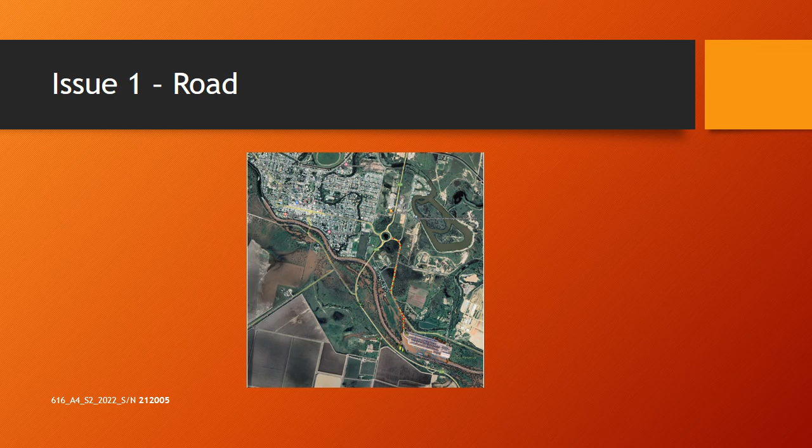And here we see the actual turn off onto Kildonna Road from the New Highway roundabout. The road itself, the geometry is okay, being that the turns meet standards, the runoffs and the elevation above the road is all quite good, but the road surface itself has degraded.

And here is the actual inland port itself. Whilst the rail traffic has taken a lot of traffic off the road from the point of view of holistic Australia-wide, it has seen a local increase in traffic and a lot of damage because of increased use.

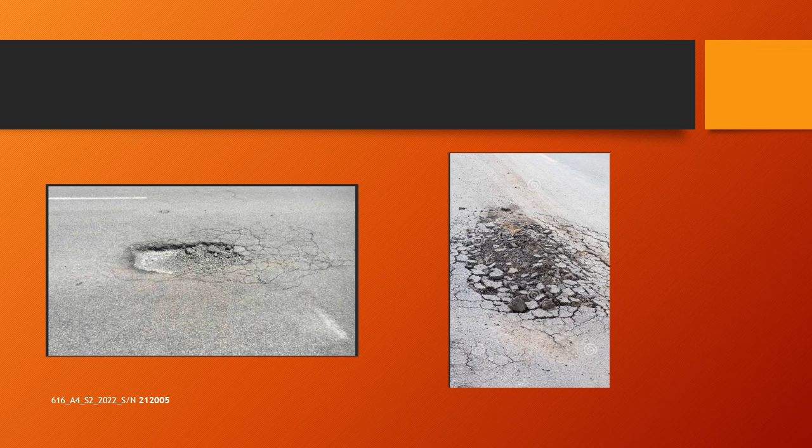With the completion of those surveys, we can then use known industry standards, being the Australian Guides to Pavement Technology, Pavement Evaluation and Treatment Design, and the TMR Pavement Rehabilitation Manual, to devise ways of interpreting the data to give us the best result for a longer term design.

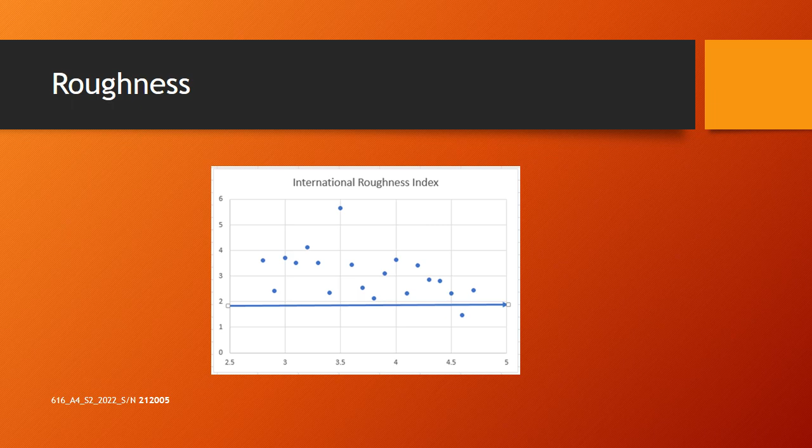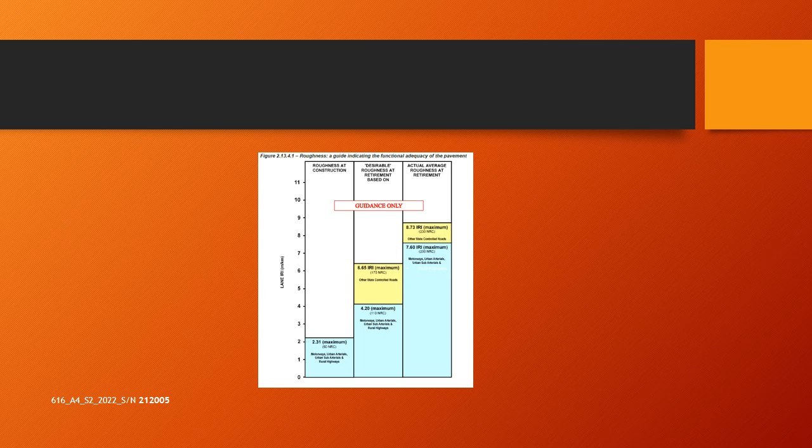The issue with this is that it basically allows water to pool up on the road, and as we all know, water is not the friend of the engineer. And it then presents a hazard to vehicles using it. Anything that pools in there then creates a problem as far as trafficability goes.

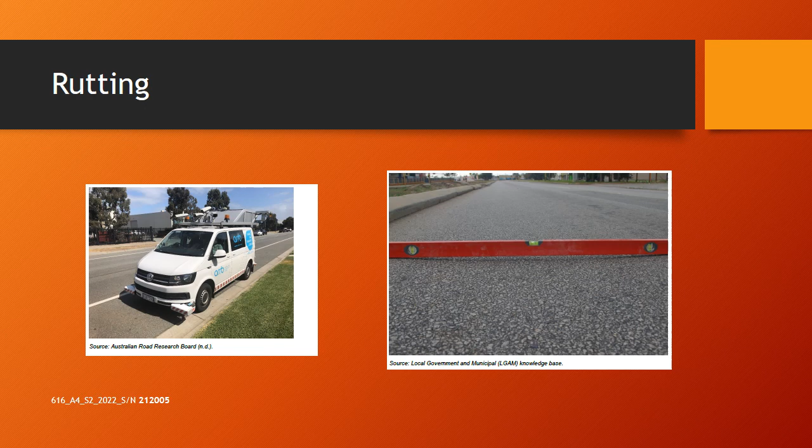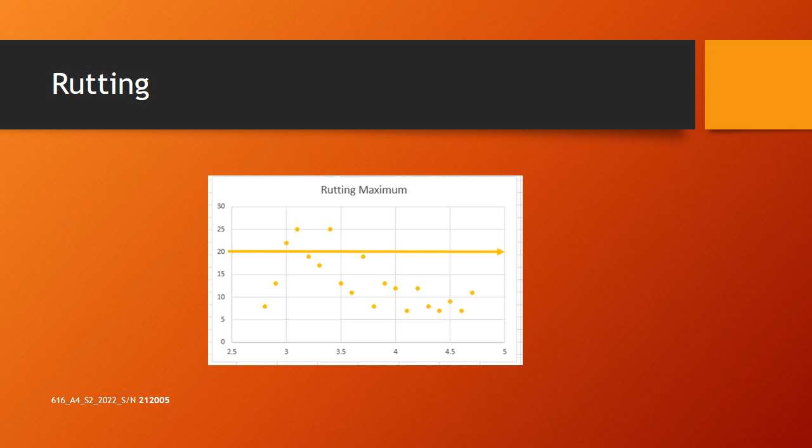We've had the rutting survey completed, and this is the result. As you can see, overall the rutting is not particularly bad. However, we do have a couple of sections where the rutting has exceeded the recommended maximum, and a couple of sections where it's approaching it. So this does indicate that there are sections of the road seeing degradation through rutting, possibly pointing to failure in the base.

The next survey that we completed upon Kildonna Road was a falling weight deflectometer. This technology uses a 40 kilonewton load to measure the rebound of the road as the survey vehicle drives along the road and completes the survey. This is actually taken in situ by the ARRB, showing Kildonna Road being measured. And it is a very effective tool.

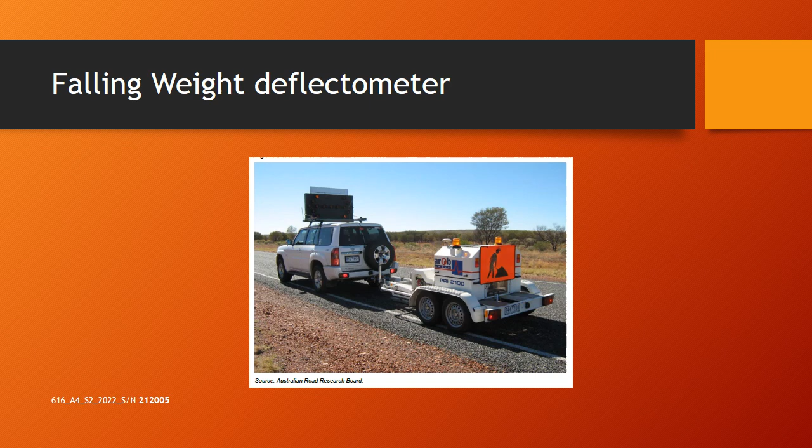It's non-destructive in that you don't have to dig up the pavement to get a reasonably good understanding of what's actually going on under the pavement and under the base.

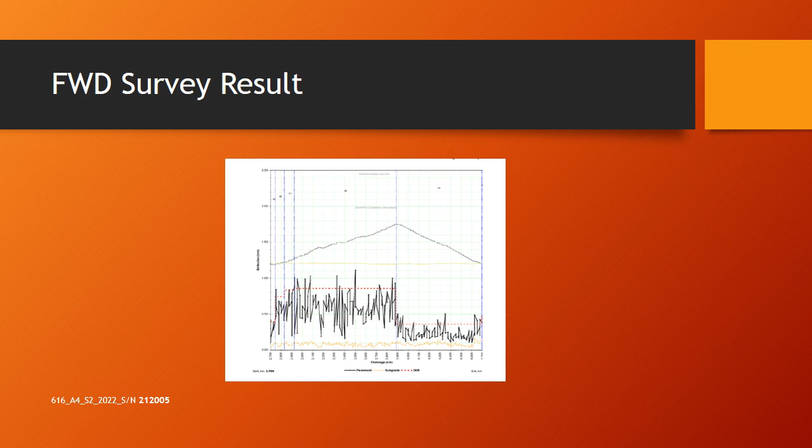The advantage of what we're seeing here is we now have an expectation of what is going on in the base and in the subgrade of the road. And this is an example of the sort of information we can glean from the falling weight deflectometer surveys, where we can basically use

the measurements of the deflections, the rebound and penetrations, to give us an estimate of the California bearing ratio, which is a pretty universal strength parameter that's used to determine the modulus of the stiffness of the soil underneath the road, to then allow us to design cover. There's a couple of ways of doing this,

and it's always a key parameter we need to have, and the advantage of that falling weight deflectometer is we now have this as part of the start of this work, so we can now use this to form an estimate of what's going to be required to complete the roadworks.

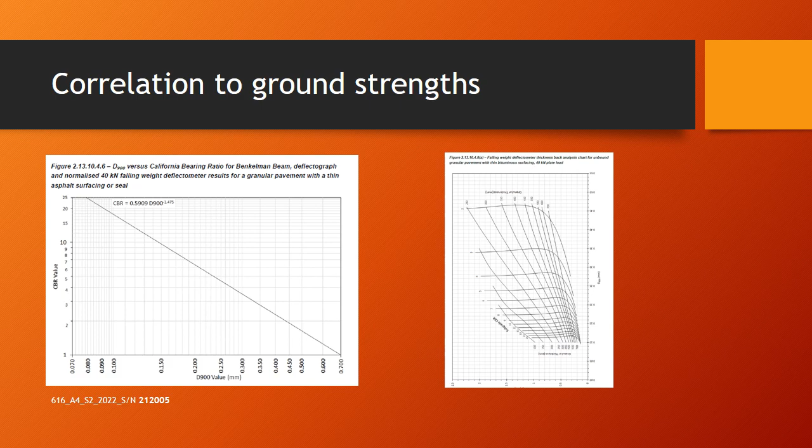By using those empirical methods, we've basically now been able to describe the sections, and we've come up with moduli for the actual layers that are important to us. So the granular layers have industry-defined parameters. They're manufactured fill, and the asphaltic concrete, the AC, what we'll see in the engineer's report, have engineered parameters that our modelling and our data use.

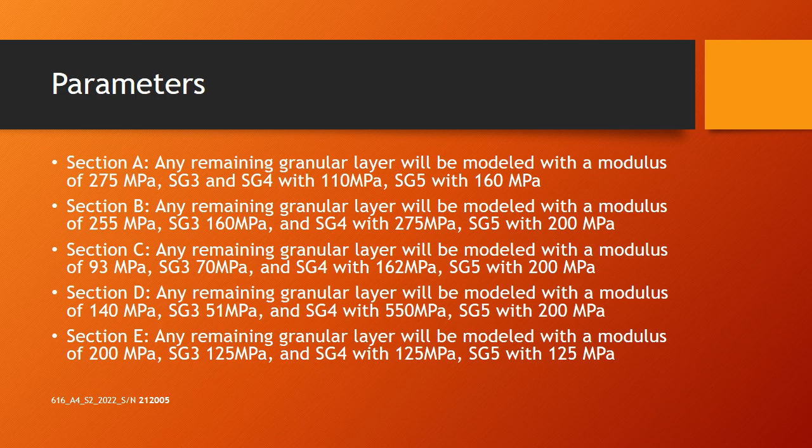However, the soils and the subgrades, they don't. They can be individual because they are still an in situ native material. Thus, we've now been able to quantify what those materials look like, and this allows us to start looking at repairs.

With regards to the running surfaces, we are in a warmer traffic zone, so Austroads and industry bodies basically give us a guide as to what we can use for the seal on the surface. So if we want to go with a spray seal, Austroads indicates that, as it's a rural highway with no high stress, with an average truck use of 2,000 vehicles, it's going to recommend a HS2 double seal, which is a standard seal for these sorts of works.

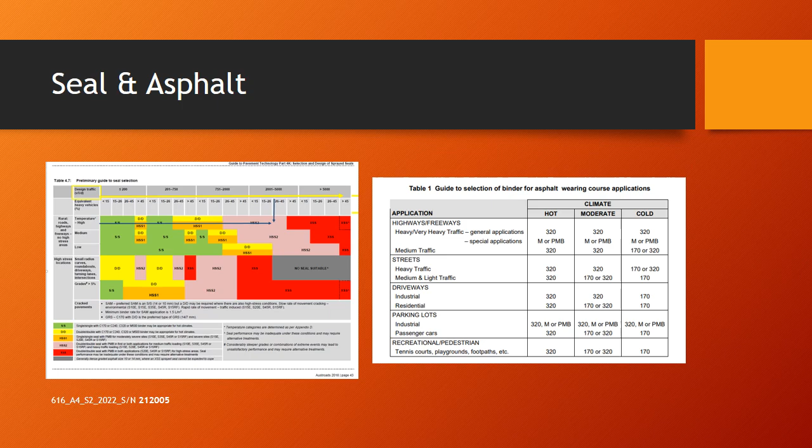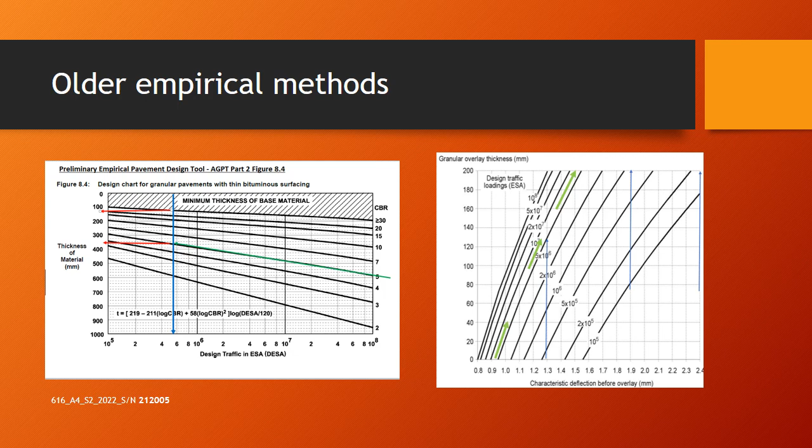It is worth stating here that the geometries of the road do not allow us to do much in the way of overlay except for section E at the end of it. Unfortunately, the roadside infrastructure is such that we can't just apply an overlay.

That was then. These days, however, we now use an industry package called CIRCLY 7, and indeed all our remediations were done using CIRCLY, and this has the advantage that it can actually do a lot of the thinking, and the optimization can be done using CIRCLY.

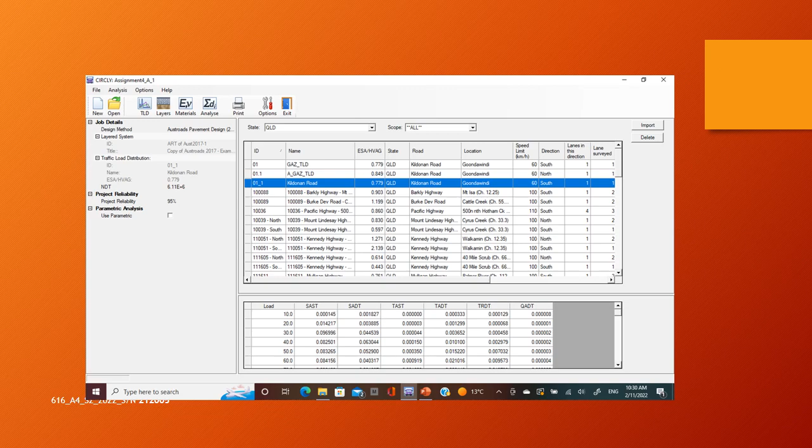We then start by loading up the parameters into our layers of the road. So you're seeing down the bottom, you're seeing a granular road base. We've then got some subgrades that we took from the estimates from the falling weight deflectometer survey to then give us, that's what the in-situ road is.

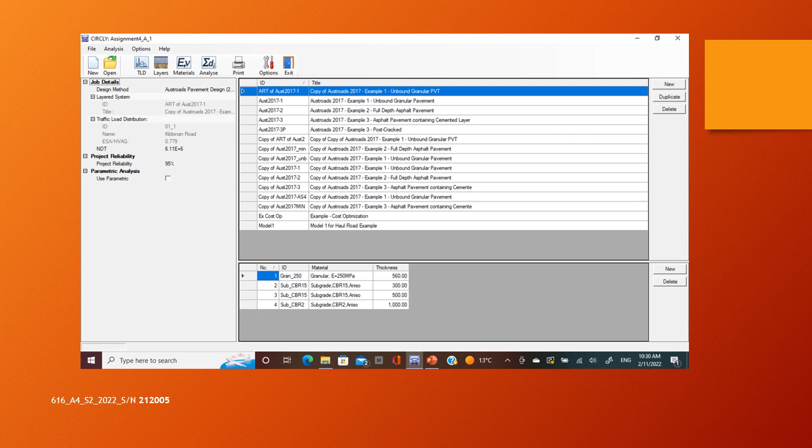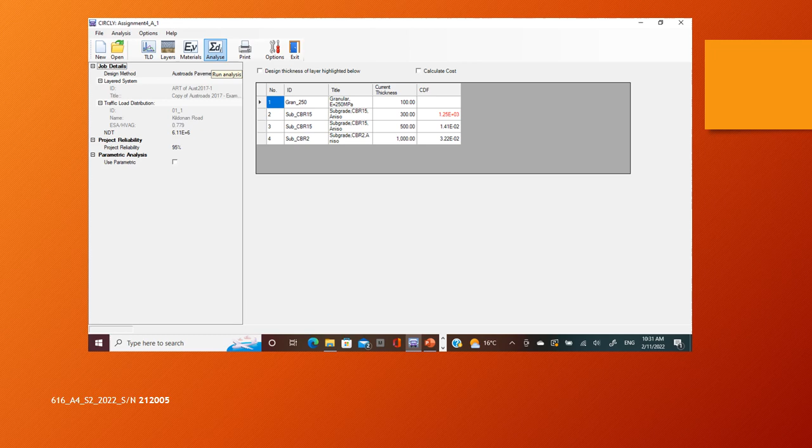We then model the basis of the model, and the software has then used itself to describe what's basically popped up, and within an optimisation it will say certain iterations don't work, and it will then supply you with thicknesses that can be used to build the road, and it basically provides you a very good remediation answer for any of these roads. So this is how this process was done. It's why each individual section has differing engineering parameters.

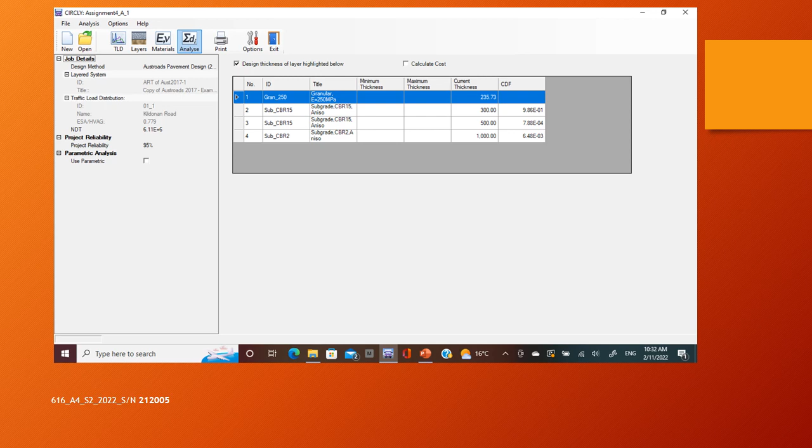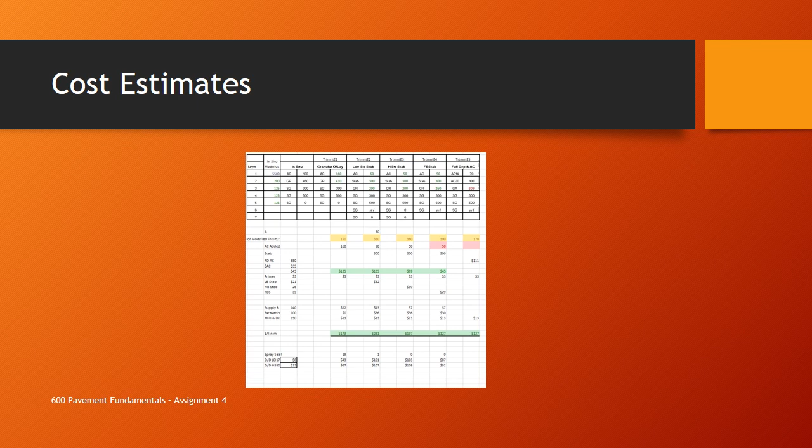Once we had parameters, we then basically used our extensive database of how we cost things to come up with costing models. So we basically costed the primers and the stabilisations and whatever else that are required for all these roads, and we've put these models into basic cost estimates. And this is the next slide here. This model here shows all of the various models that were estimated.

The pink blocks show the expected reseals. The downside to thin bituminous seals is that they do require resealing to preserve the base and stop the road from degrading to get the maximum out of it. And you can see that there's going to be a couple of sections in a 20-year life of interruption, and that is probably going to be one of the criteria that hopefully councillors will take into account when you make the decision, is the reseal time and interruptions.

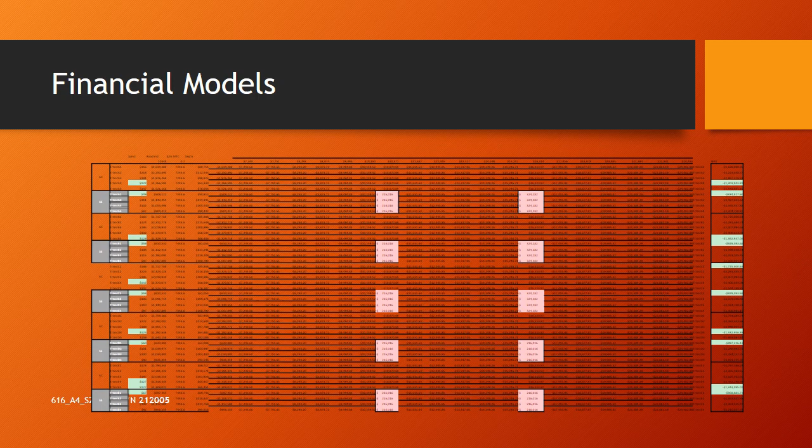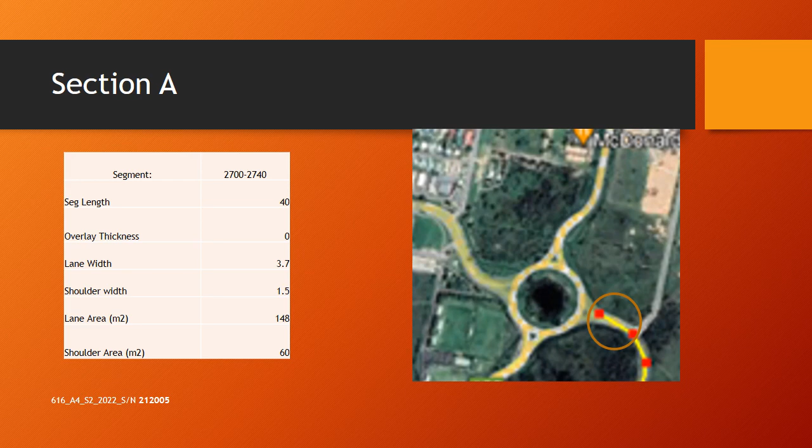Section A, basically running from the roundabout to intersection 1. It's only 40 metres in length, so it's not a particularly big section. It does have shoulder area associated with it, but it is not insubstantial, and it is that first section. The two optimised costs we've come up with is a spray seal, the less durable option. It has the lowest initial cost of all the options. Total cost is relatively low for this section. Basically comes down to $49 a square metre.

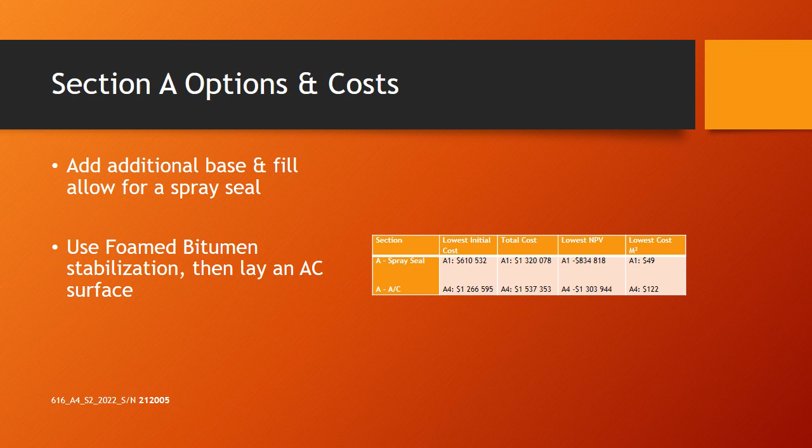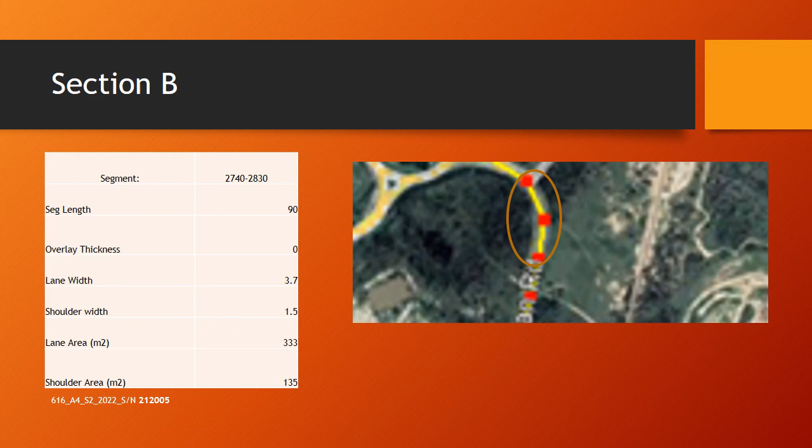However, the more durable option, and probably the one that we would prefer, would be the use of foam bitumen to stabilise the base and get some strength into that base to withstand that loading. And then we put an asphalt running surface. Section B, which is between Russ Hughes Road and J. Peterson Road. Again, slightly larger than the previous section, slightly different. And here we have the costs, $59 a square metre for the spray seal with a little bit of fill to make up the base. So we excavate out and put some fill, or $129 for a full depth AC pavement.

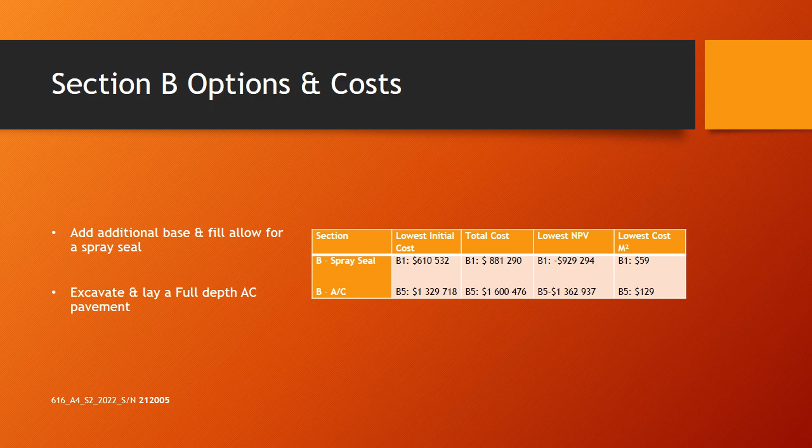Okay, section C, another shorter section. Very similar to the previous one, $59 a square metre for the spray seal option, or $132 a metre for the foam bitumen stabilisation and then AC surface. Slight differences in remediation due to the differences in the ground conditions in each of these sections. Section D, this is a longer section, 900 metres, obviously going to be relatively more expensive than the other section. But you can still see on a unit cost, $60 a square metre is not terribly much for the spray seal base, or $125 for the foam bitumen stabilisation and then laying an AC surface on top of it, which will get a lovely driving result.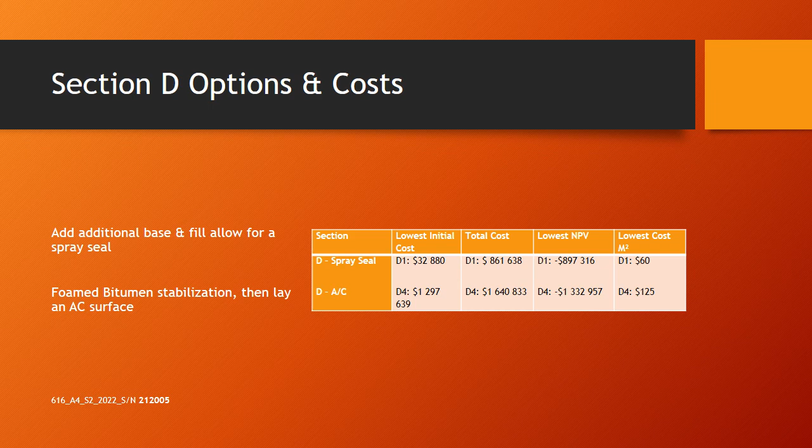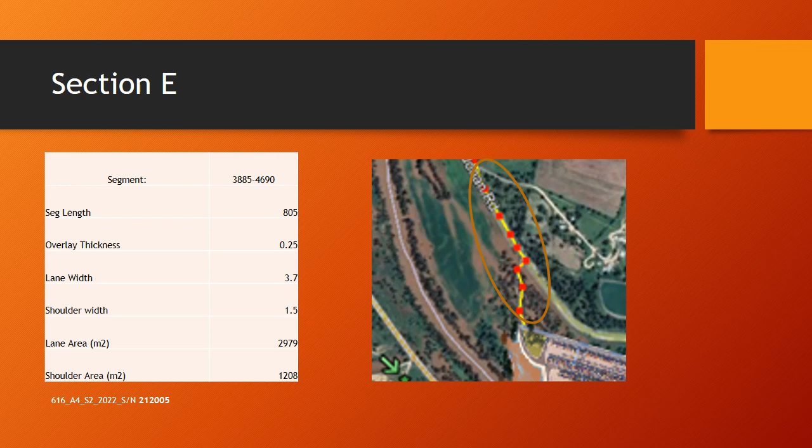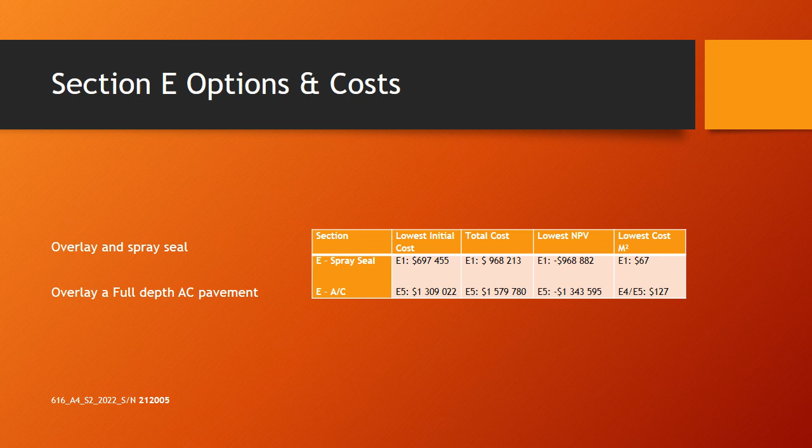And section E, the entrance to the Ash Barty terminal, you're seeing again another 800 metre section, not the longest but quite a large section. Again, $67 a square metre for the spray seal, or $127 for full AC overlay. Now, section E is the only section where we don't have pavement geometry issues with regards to height. So we are able to just purely put an overlay either way onto the existing base to give us the strength into the base and the wearing course. So there's options for the council to select there whichever way we wish to go with the funding.

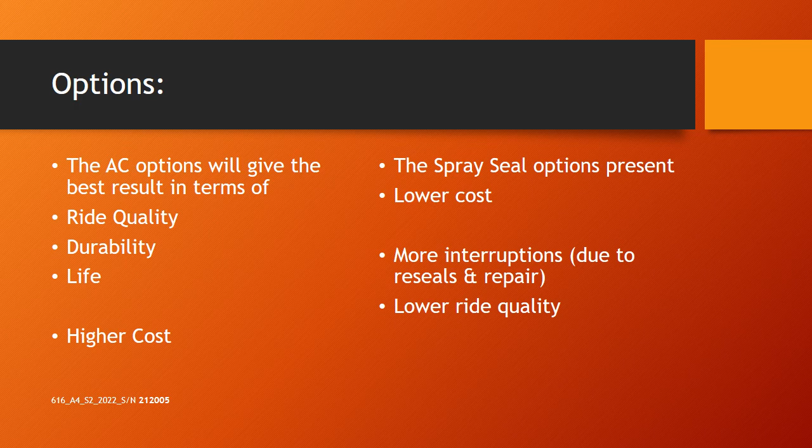The recommendations are, in all cases, the asphalt options will give the best results in terms of ride quality, durability and life. They do come at a higher cost, both in the initial outlay and over the overall life, but there's less interruptions. And in a commercial road, it can be argued that some of those interruptions are quite massive, isn't it? The spray seal, massively lower cost. We can basically get a job started relatively easily and quickly, but it does have a lower ride quality, it's noisier, and there's more interruptions due to the reseal and repair that are required.